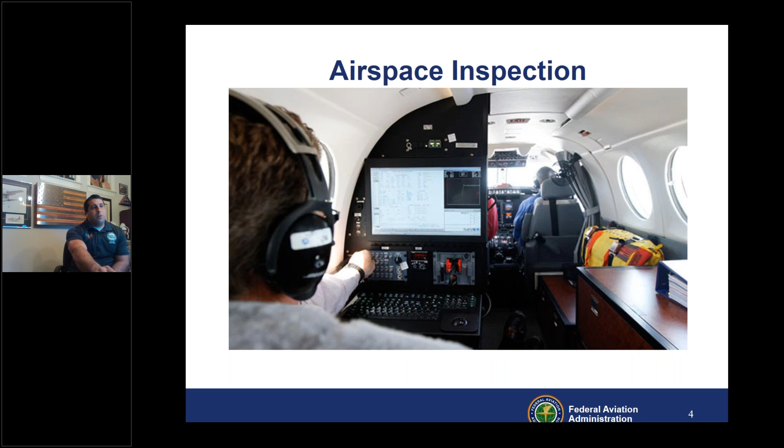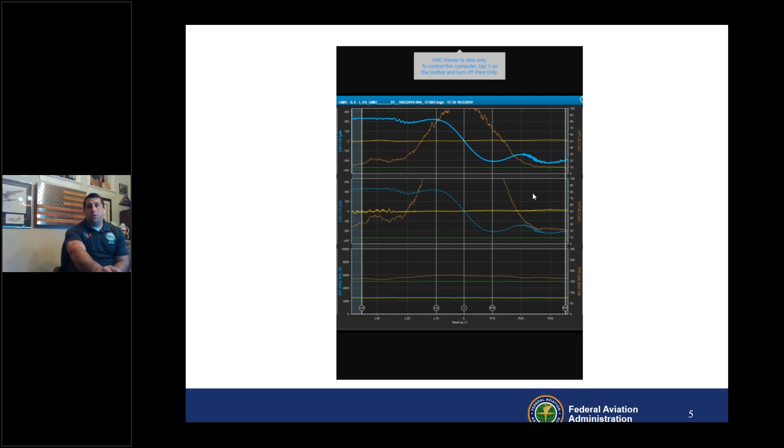They have a screen here in front of them and another one that pulls back out, and periodically you'll see recordings like this. This is a healthy dual transmitter capture effect localizer at, I forget where I took the snapshot, but this is the kind of stuff that we see, and every one of these lines has a different meaning, and all together, when it's healthy, it looks just like this simple CDI on your HSI or whatever instrument you're using to stay on course for the localizer or a VOR, as the case may be. So we're looking at all this stuff to try and make sure that you see a good healthy signal.

One of the reasons we wanted to reach out, and I'm happy to be here to talk to the public and answer questions, is that we want to make sure that we have an opportunity here to ask you guys to help us with the flight inspection, and then also let you know what we're doing for you while we're out there.

So there is information in the AIM available to you about flight inspection and what we do. You can find it at 4-3-24, and unfortunately, it's really not much if you look it up. It's 2 paragraphs. But what it does say is that we're not just flying approaches, right? We're out here doing maneuvers through airspace at relatively low altitudes, 1,500 feet and below, sometimes even lower.

And it may not make sense to you when you're out there flying, when you see this King Air or this Challenger flying 3 feet off the approach light system, really low on an instrument approach, or flying sideways across the final at 2 miles away from the airport. So it just says that we do maneuvers that may not look normal to you out there. We might fly opposite direction because we're flight inspecting runway 14 when the winds are favoring runway 32,

and then it goes on to say that due to this, the air traffic controllers are giving us special handling, and they do. They're really good about helping us out to get the inspections done. Because if we delay 15-20 minutes to get an inspection done, that delay per inspection adds up to hours in one day, and then that pushes back the next day, and next thing you know, we've wasted a bunch of taxpayer money just burning jet fuel, waiting for our turn to do an inspection.

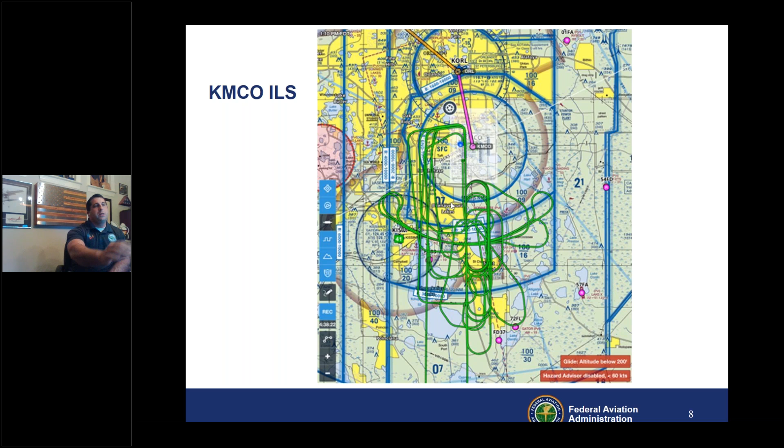We also do ships. Gee whiz, it's fun for us. But ships have TACANs on them, and we go out there and fly those things and certify them. It's a good bit of fun. So this brings me to one of the more informational topics. That's all kind of big picture what we do.

Now I'm on to a topic that I think would be useful to you guys, especially with GPS being such a big up and coming piece of the future of the National Airspace System. So at the top, you see I've got glide slope versus glide path versus vertical descent angle, VDA. This is something that I really didn't know when I came to flight inspection. I'm not embarrassed to say that. There's a lot of symbology on instrument approach plates.

I know that this is not Jeppesen. Jeppesen basically takes the procedure that we do and they print it in their own format. We don't flight check, we don't inspect Jeppesen charts. We inspect DoD charts. So that's what we have here. I'm sorry if you're used to Jeppesen. You can pull one up, and you can pull up these very approaches and compare the symbology.

It's very similar. This right here is an ILS, and you'll see I've highlighted where it says GS 3.0, threshold crossing height 46. GS standing for glide slope, right? It's an electronic signal being emitted out into space from the antenna, which is really a reflection. And they've depicted this feather here. What this is telling us is that this is a glide slope.

It's precision. It's been flight inspected, that it's safe to fly all the way down to a DA, and it has also been checked, TERPSed for obstacles. So if you stay on center line all the way down, no matter what the barometric pressure is outside, you're safe as far as obstacles go, and the signal's going to be good to go. So that's a stipple, and then a glide slope.

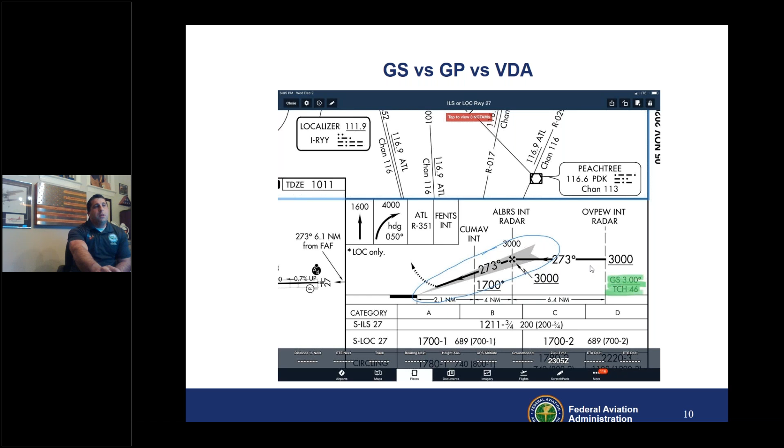Next slide, we've got glide path. Now this is an LPV. A lot of people think of it as a precision GPS approach. A lot of training programs are allowed to treat them as precision approaches these days. So in here, it's depicted a little bit differently. And you'll see you have GP for glide path 3.0, threshold crossing height 46, and a stipple.

So with an LPV, what's happening in your box is it's taking your GPS solution, it's taking SBAS, Satellite-Based Augmentation Systems. In the United States, that's WAAS. In Europe, it'd be EGNOS, and the Indians, I believe, have a program as well as the Japanese and the Russians. Here, it's WAAS. And your GPS is computing a WAAS solution that includes altitude. And it's precise enough to bring you all the way down to, in this case, 200 foot above the ground. It does not matter what the barometric pressure is outside, what the temperature is outside.

Your GPS is deriving lateral guidance and vertical guidance. LPV stands for, if you don't know, Localizer Performance with Vertical Guidance. And so that means that the GPS track is a triangle, it's a funnel. So when you're at 1 dot right of course at the final approach fix, you're further off center line than you are when you're at DA. Same thing's true for the glide slope. It's deriving a precision glide slope from your GPS location, and you're being funneled into the runway.

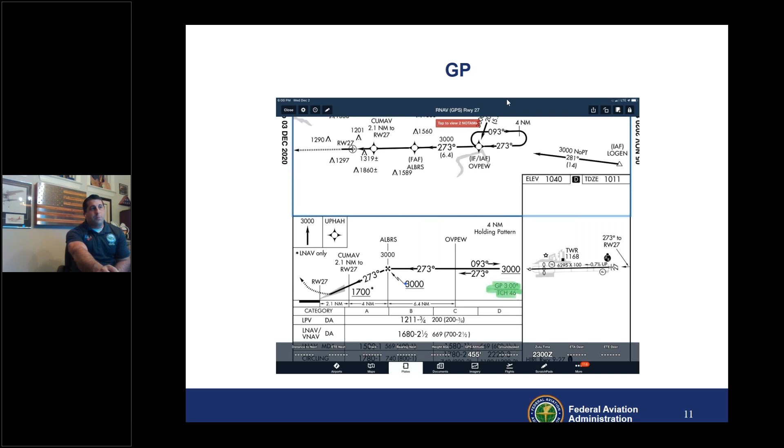So that's glide path. Now, here's the reason for the topic, because that's probably all stuff that everyone knows already, and I'm boring you. Here's the fun one. VDA. You notice it's depicted differently, 3.1, and we have a little angle here with a threshold crossing height. It doesn't say GP or GS, VDA being a vertical descent angle. Now, this is not an LNAV/VNAV, it's an LNAV approach. You're probably going to find when you program...

I'm sorry, can I break in? Comment from some of the viewers, a lot of acronyms and a lot of non-instrument rated pilots with us on the webinar. So if you can explain some of those a little bit, that'd be helpful. Sure.

I know you know this stuff inside and out, and that's great. But if you could explain a little bit of it as we're going along, that'd be fantastic.

Sure. So going backwards just a little bit, we talked about glide slopes. So that's your instrument landing system, electronic glide slope for doing a precision approach down to the runway. You've got your glide path, which is your vertical guidance to get from your final approach fix on final down to the lowest altitude you can descend to using a GPS signal.

And it's using GPS, which is your global positioning system, to derive your glide path, which is like a glide slope. It's your vertical guidance down to the runway. So you'll get a little snowflake, if you will, on your avionics that tells you when to descend and how fast to descend, and if you're above or below your glide path in that case.

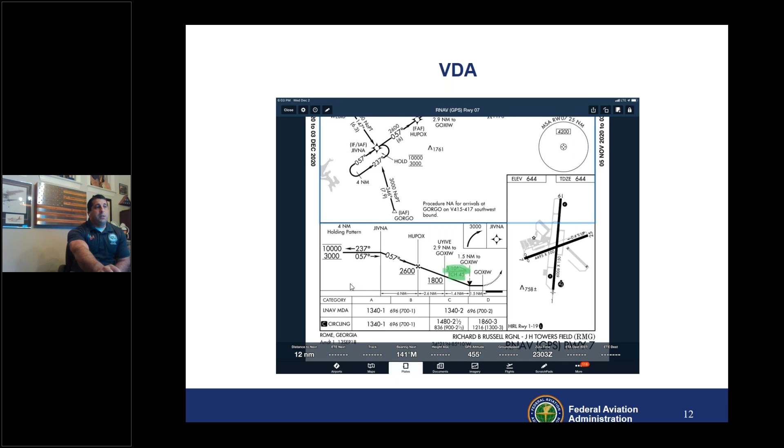So what we do for flight inspections is we go out and we see these, and we actually check them below that recommended glide slope that's coded in your GPS to see if they're safe or not. And if they aren't, you'll see something like this. You'll see in the note in the profile view here, visual segment obstacles.

If you're flying this on your GPS, which you would be because it's an LNAV approach, it's going to give you a recommended glide slope to follow. And it's probably 3 degrees, and it's just mathematically calculating out 318 feet per nautical mile, and here's where you should be.

Well, on this particular one, if you stay on glide slope all the way to the runway and you never change it, even beyond MDA, which is your minimum descent altitude, which is where your visual segment of the approach starts, if you follow the computer all the way down, then you're going to hit something. Someone like me has flown this approach and seen an obstacle on final that's beyond the point where you switch from instruments to the visual segment.

I don't think many people knew or understood that difference there. Everyone always says don't fly below minimums, but don't poke your head down below MDA and just think that, well, because the GPS gives me a glide slope there, I'm safe to fly it. You may find that you're not.

Additionally, this particular one's been checked, and we saw something. It says visual segment obstacles. Well, if we check one and we don't see anything, we don't add any notes at all. If we have not checked one yet, there won't be a note there. So there's no way for you to know if this is an approach that one of us has come through and actually flight inspected yet. Does that make sense? Are there any questions on that specific topic?

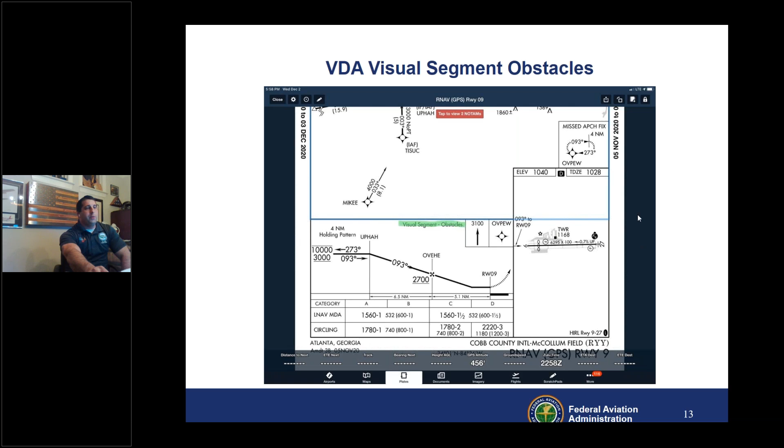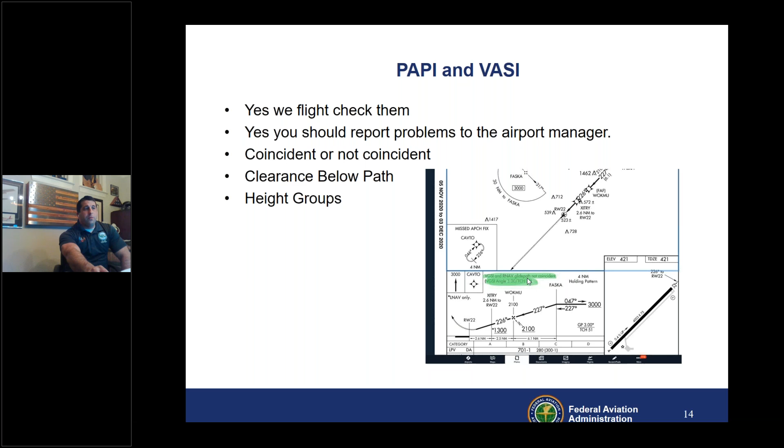All right. So the next one's more for our VFR pilots as well as the IFR pilots. So maybe I should have started with it because it throws you a bone to both. But we're going to go on to PAPIs and VASIs. I took an approach chart here and highlighted where it says VGSI, visual glide slope indicator, and RNAV glide path are not coincident. So this happens a lot. I mean, it's really common. You'll see approaches that have vertical guidance. So you got a glide slope that's telling you when to descend and how to descend to the runway. And then you look out there at the PAPI, and the PAPI shows 3 red and 1 white, or 3 white and 1 red.

And this note is designed to tell instrument pilots to expect that, right? Well, why would that happen? Well, it could happen for several reasons. PAPIs specifically come in several different height groups. You got height group 1, 2, 3, and 4. And the best way to think about that is that if you're flying a Cessna, you're really close to your landing gear as far as physical distance from the wheels. Whereas if you're flying a 747, you're a pretty good ways from the touchdown point, well above it. And so the visual glide slope indicators, the PAPIs and the VASIs, are designed to be used visually from the cockpit looking out the window. But the glide slope antenna or the bottom of the aircraft may not be in the same location as the signal it's following, or the GPS antenna, for example.

And so we set up those height groups based on what type of aircraft are expected to be at that airport. The airport PAPI we just did this afternoon in Kentucky was a height group 2, set up for Cessnas and Barons and things like that. Height group 3 is also super common. Height group 4 would be for a 747. So if you go fly your Cessna into Charlotte, you're going to see this note that says the glide path indicators are not coincident with the ILS. And that's because they're set up for height group 4. It's supposed to be done that way.

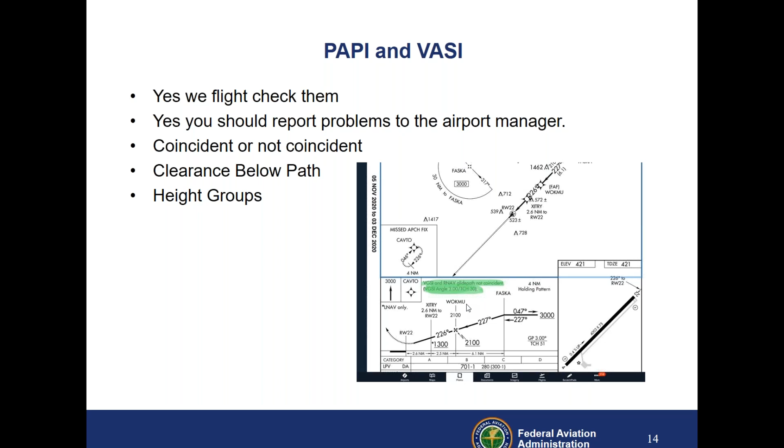VASIs are obviously set up a little differently, but we check them in a very similar manner when it comes to what we're looking for. So that's why I include that there. And all the other different visual glide slope indicators as well, but these are the 2 most common by far. And I think that's all I really had. I was hoping to prompt some questions from that.

Yeah, James, I'm ready to open it up if you are. So let's go ahead. We'll turn your cam back on, so we can see you. Yeah. I'll turn mine on here. All right, let's go through, we got a bunch that have come in.

A lot of folks asking questions about various acronyms. So the PAPI, Precision Approach Path Indicator, apologize for that. VASI, Visual Approach Slope Indicator. And let's see, I'm going to go back up here a little bit to some earlier questions. Another question about scheduling your inspections. Does it make sense to fly inspections during off-peak hours?

So that's a great question. We get that all the time. Well, when are off-peak hours? If you're talking about at night, most of what we do is check for obstructions. It's going to be difficult to check for obstructions at night. Off-peak hours, we already don't fly on the weekends very often because the weekends are the peak hours for general aviation. Do we try our best to avoid congested times? Yeah, absolutely. But when it comes to scheduling inspection, while that's a priority, it's racked and stacked with all the other priorities.